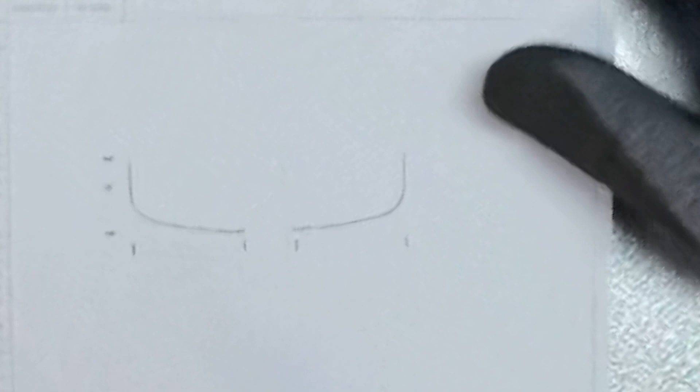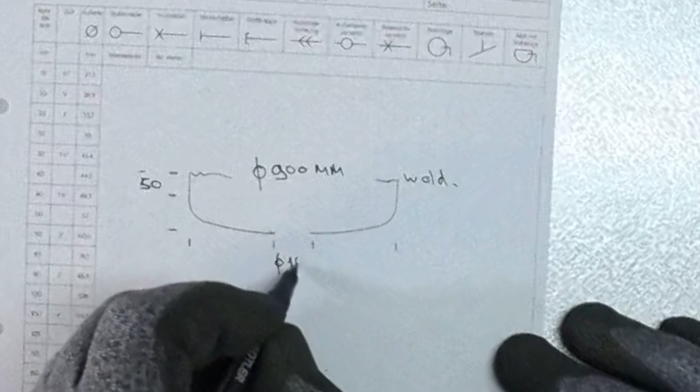Okay, so that's my dome end, and I know the diameter is 900 millimeter, and I know this distance is 50. And here is where the weld seam is, and I know here we have a diameter of 100 millimeter. So that's all the information I have.

So I went to the site and took the circumference. These are naked sizes, so there's no insulation, and the insulation thickness will be 50 millimeter.

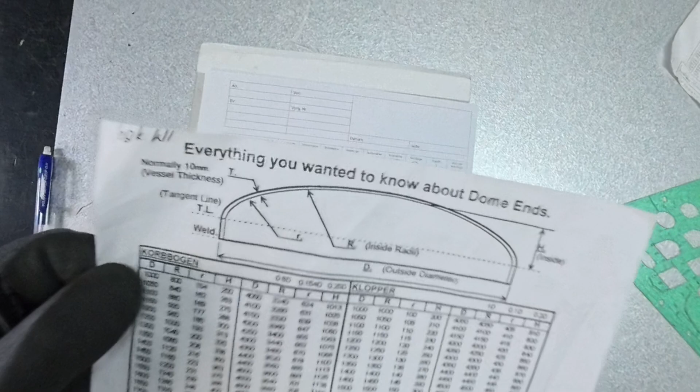And now we're going to find out what the big radius is, what the small radius is, and the height. Therefore I have a list. So I got here a list, and that's a dome end.

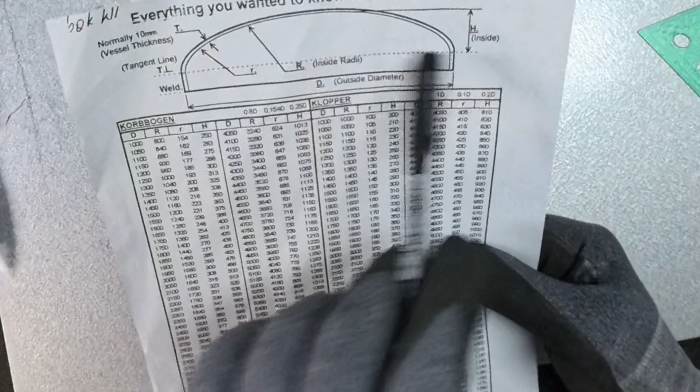I'd say the Korbbogen is most commonly made, and the Klopper, as far as I know, is mostly made out of stainless steel. For the dished one, in the insulation we then make a conical cap or something like that. But for this video we're going to concentrate on the Korbbogen.

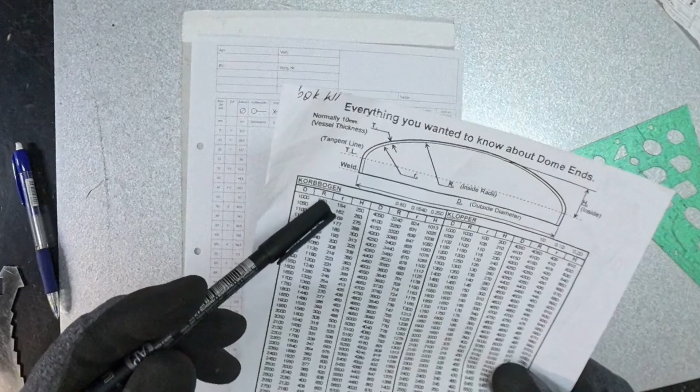As you can see here on the list: Korbbogen diameter, big radius, small radius, height. That means if I know the diameter, these three are the formulas: 0.8 multiplied by diameter is the big radius, 0.154 multiplied by diameter is the smaller radius, and 0.25 multiplied by diameter gives you the height.

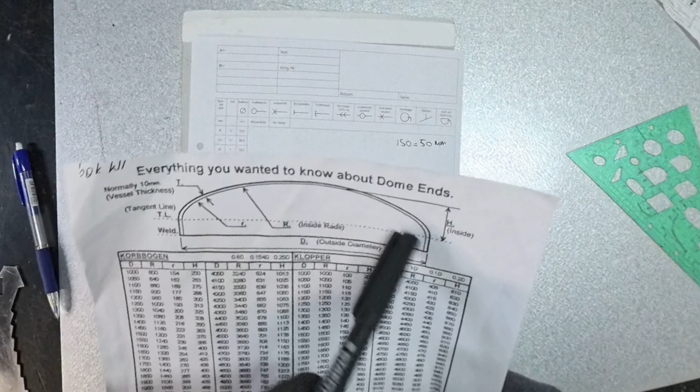But these are all inside sizes, meaning the material thickness of the vessel is normally 10 millimeter.

This list starts from diameter 1000 and goes up to 4000, but as far as I know 8000 is the biggest, and those are also real rare, so you don't see them often. What we're going to do now is calculate using those formulas, because my sizes are not on the list.

So I'm going to take my calculator, and I want to know the big radius. That means 0.8 multiplied by 900 gives us 720 millimeter for the big radius. So the big R is 720 millimeter.

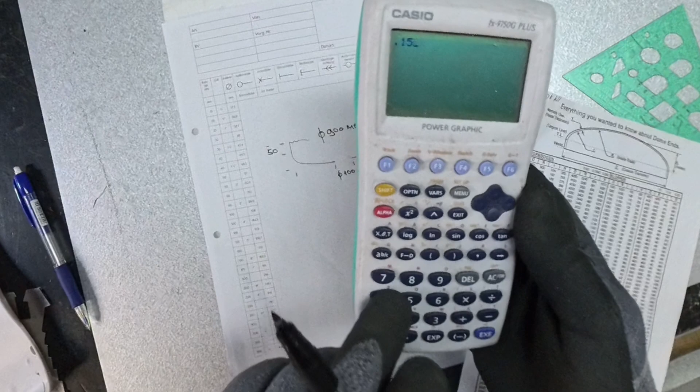Okay, now the smaller radius is 0.154 multiplied by the diameter, that means 900, gives us 139, which is the smaller radius.

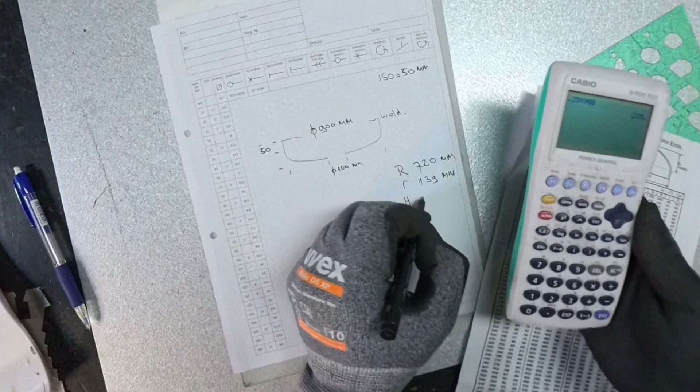And the height: 0.25 multiplied by 900 gives us a height of 225 millimeter.

So now all the information we need is there: the big radius, small radius, the height, and the insulation thickness. We have the naked diameter of 900, and we know from the weld until the end of the radius, where the radius starts, is 50 millimeter. Now we have all the sizes, so let's get started.

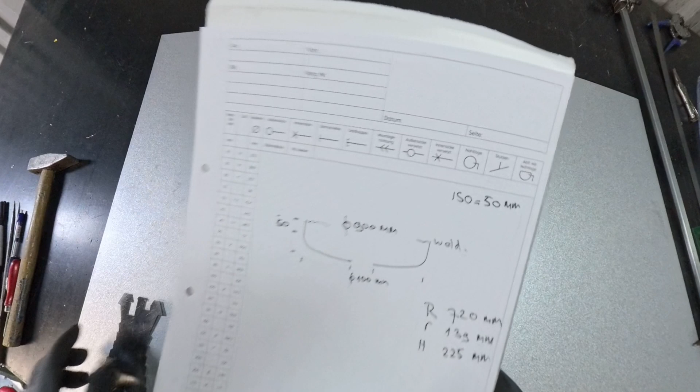First what I'm going to do is make here a working line. Okay, now we have our zero point, so I'm going to give a little punch here, so that later when I put my bow divider on, the needle won't slip. Okay, so this is the complete line.

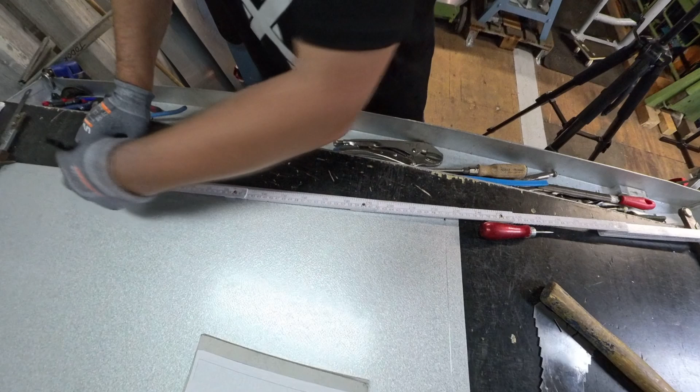And next, what we know is the big radius is 720 millimeter. So 720, we put it here on the line, and then we mark here. Put the mark, so this distance is 720 millimeter.

Okay, now what we also know is the height. The height is 225 millimeter. So that means I can already go from the 720 radius, go down 225, mark here, and I'm going to put here an angled line.

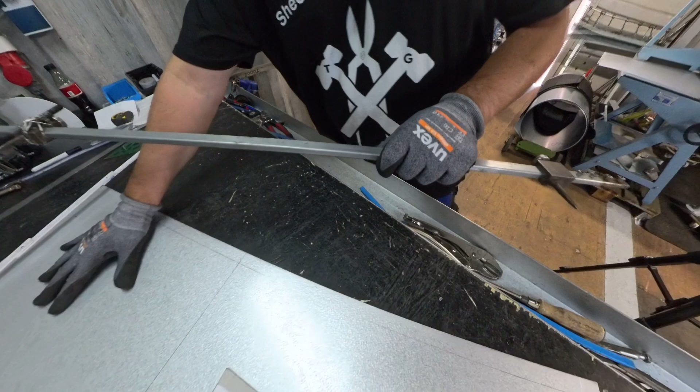And what we do next is, I have here a big circle bow divider. So what I'm going to do, I'm gonna put here this one where I marked it. Okay, wait a minute, cap off, and now I'm gonna put it here on the 720 on the big radius. Okay, got it. And now I'm gonna pull a line. So I know the small radius is coming somewhere over here, so I'm gonna make it a little bit longer. So that was the big radius.

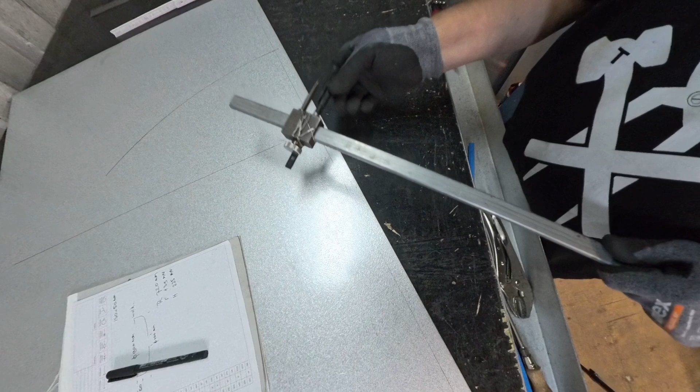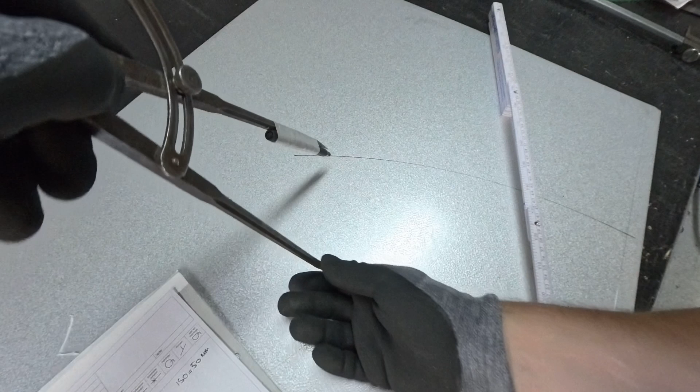Now the smaller radius says 139 millimeter. So I can do it here, take here the bow divider, 139. And now I have to find somewhere here on this line where it touches exactly, and then I make here the bow. So here could be a little tricky. Can be happen you miss it. So if you're not sure to do it and you want to do it a more precisely way, well, then it's also an easy method.

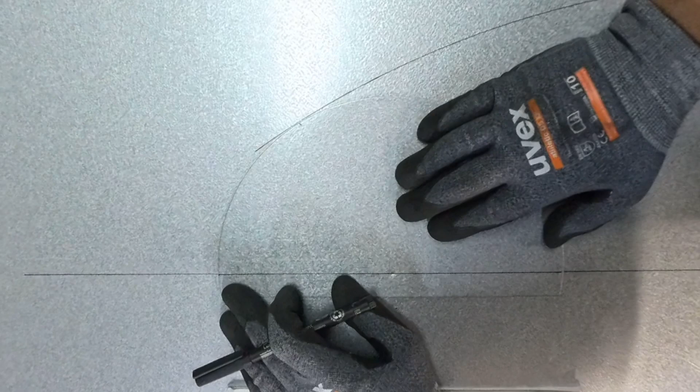You just cut a half circle where the radius is 139, and now I'm putting this here on the line and move it forwards until I see, so I'm moving it forwards. Okay, and that touches here. And then I make the line, and I'm gonna hit here another time with the hammer.

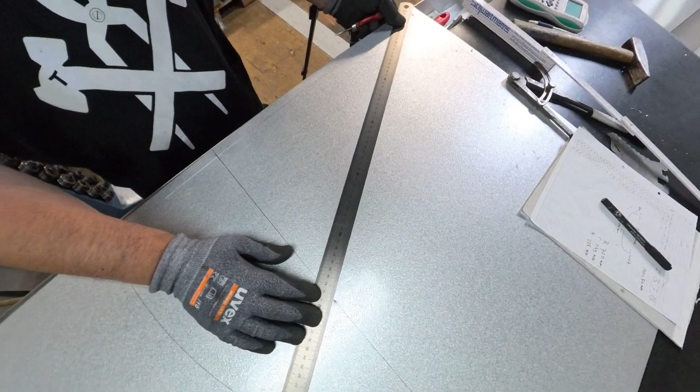So I've got a marker over there. Okay, so we check it. This should be my line. So, that's my tangent point here. Okay.

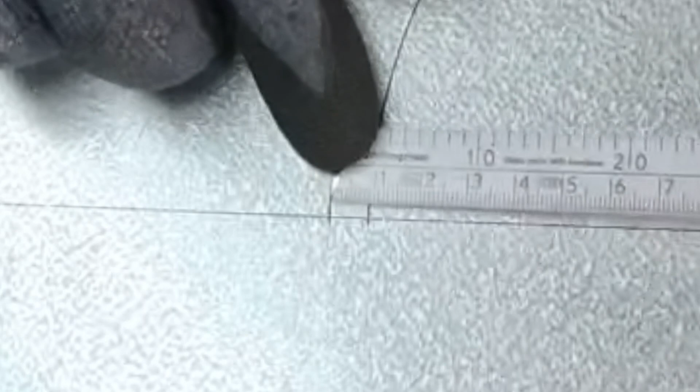Next, what we know is we have here on the paper we see diameter 900, so that means a half is 450 millimeter. So that means I go here from my starting point here, 450, and 450, and I just make here the difference. So this should be here, this distance should be then my outside with material thickness, and I have here, well, I will say 8 millimeter. So 8 millimeter I have there.

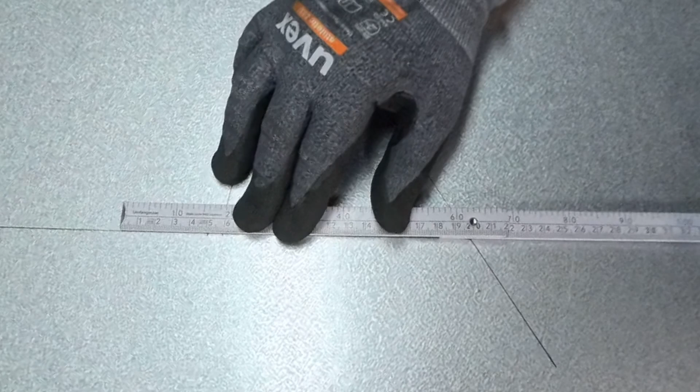So what I do next, I'm gonna take this bow divider, and because I know it's 8 millimeter, what I do first, I give 50 millimeter insulation. So, almost forgot. So that's my 50 millimeter insulation. And now, taking it from this point in the bow divider on this here, and move it until the line. See?

And the same thing I repeat with a bigger bow divider. So put it here, just put it exactly on the line there. And there it is. So that is now my outside, or the circumference of the dome end cap. And yeah, that's where we're now going to continue to make the developing, making the pattern for the dome end.

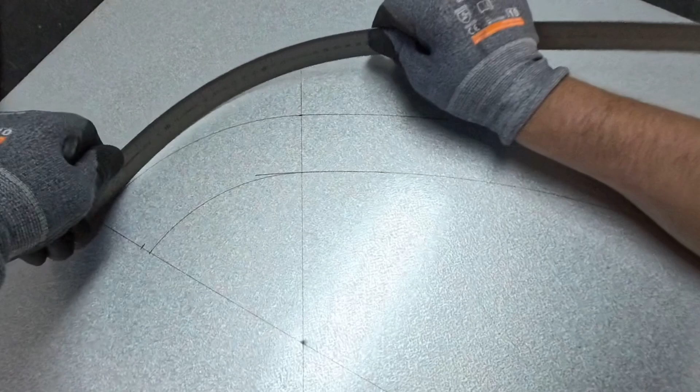Okay, so next thing, what I'm going to do is, if possible, I measure these sizes. So I have here maybe a better tool. Here, I one side with inches, other side with millimeter. It's also good. So I have here 205 millimeter. And here I have 424 millimeter.

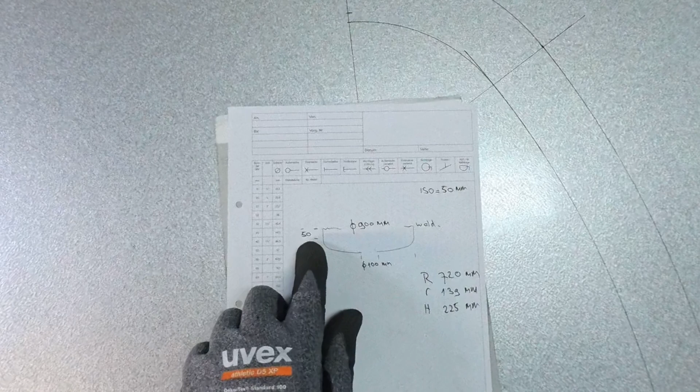Okay, so the next thing is what we're going to do to complete it. We have here this plus 50. So plus 50. I always like to check if everything is still okay, if everything is in an angle. Okay, is, so that means that's my dome end now, the side view, the complete side view from here till here.

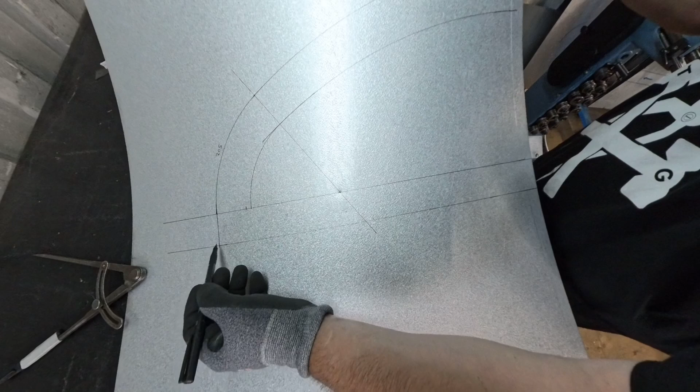Oh yeah, we had said we have a hole here, diameter of 100 millimeters, so we go 50 millimeter from here. And that's the 50, that makes double 100, so this will give here diameter of a cutout of 100 millimeter. Cutout. So here minus 50 for the template, so that we know how long we're going to cut the template.

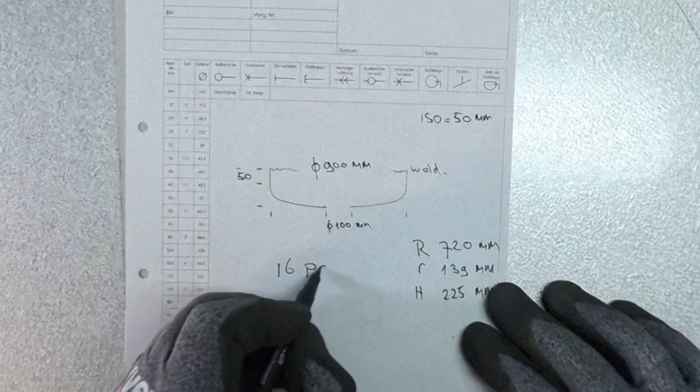But before we go there, I forgot something here to mention on this isometric. I thought it was complete, but now we are stuck to it, so I forgot it. I want to make this dome end cap out of 16 parts. So 16 parts, so you can, I always like to make dome end caps where you can divide it in 4, so 16 is easy to divide in 4. It's 90 degrees when it's 4 parts. So, and I want to make 16.

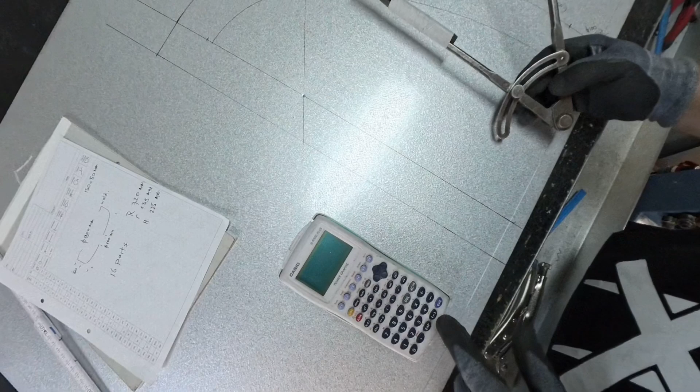That means next thing what we're going to do, you can do it on both ways, or there are 2 ways. That means if I have 90 degree and I want to divide it in 4 parts, that means 23 degree. Okay, my calculator is rounded off, but it's normally 22.5. And then you have to split it again, and then you will get 11 point 25 degree. So that's if you want to do it with an angle ruler, for example, huh?

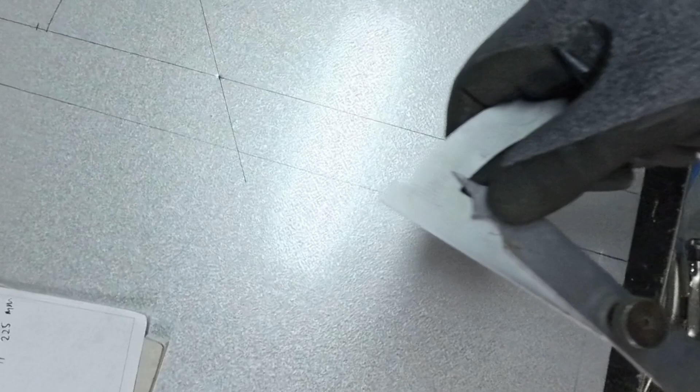So normally 11, 10, 11, and here a little bit would be 25. That means on the other side angle, other side, okay. Here 11. Yeah, so this would be my angle. But we're going to do the classic way.

Just gonna make a circle. And if I divide that circle in 2, and make here just to mark it, that will be here. So now I have 2 halves of 45, but I need 4 parts, so no problem, we're gonna divide it again. That will be the next one.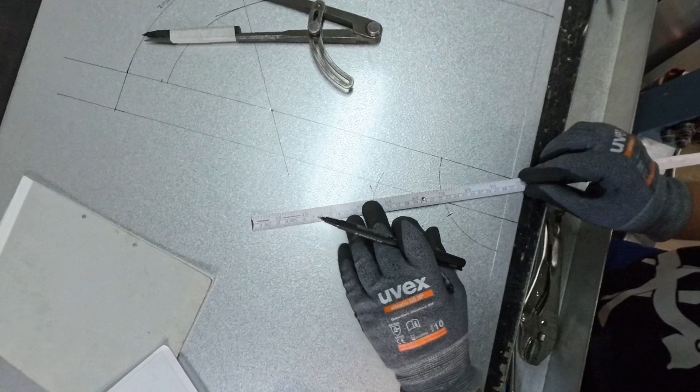Okay, so now I have 1, 2, and then here imagine 3, 4 parts. But for my template, because I'm going to go left and right with my sizes, I need it divided again. So again, 1 time here. Okay.

There it is. A longer one, so that means I go from this point here to the center of this one. That should be it. Okay, let's check it. Well, that's pretty good. So, yeah. See, so.

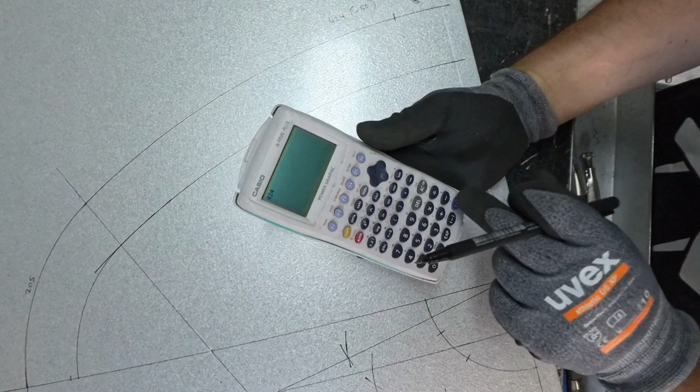Okay, now, what we do next is we're gonna divide this part first, and so it's 424 length minus the 50 gives us a length of 374 millimeter, and I want to divide it every 60 millimeter. That means six times.

So what I'm going to do, I take here 60 millimeter in the bow divider, 60, and then I'm gonna go from here, from this tangent point, 60.

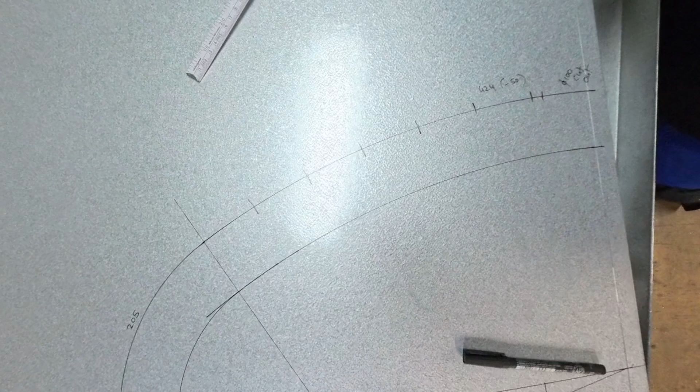Okay, so these are now divided, and now I want to divide these 205, but it's enough when I have here a screw, here one in the middle, and here, so it's easy. What we're going to do next is we're just gonna divide this in 2 halves, also with the bow divider.

Okay, so that means I'm gonna make here a hole, here, here, and maybe somewhere here. So next thing what we're going to do is we're gonna pull up those lines straight up. Therefore I'm gonna turn my metal around. And take here this one.

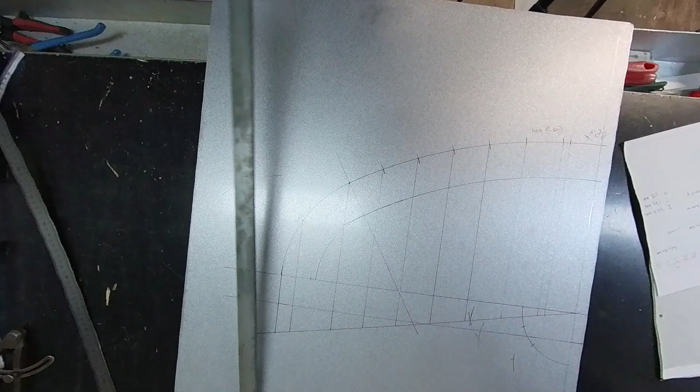And we're gonna pull those lines until here where the angled line is. Okay, so now the lines are drawn, and what we do next, because I want to give also swage allowance, and I'm going to give 6 millimeter swage allowance. So 6 millimeter comes here a line.

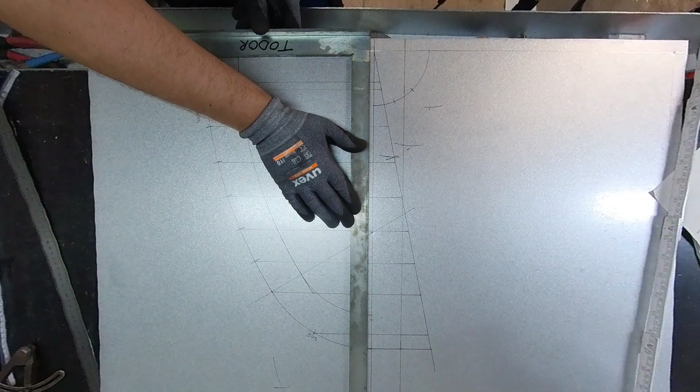That means now these are now my points. Okay. That's it. These are now my points. So what I do next is

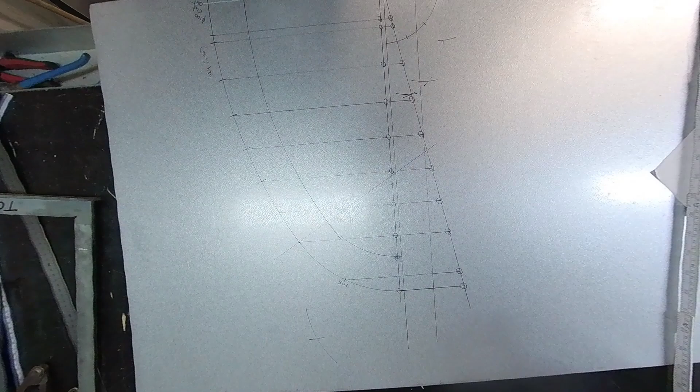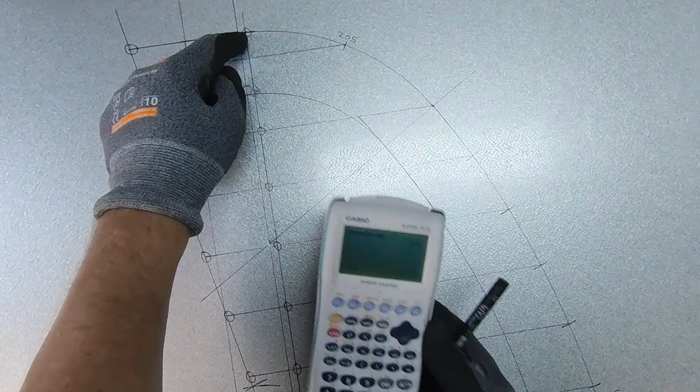I'm gonna take my calculator again. So 205 plus 424 minus 50 gives us 579. See the complete circumference until the cutout. But we have plus 50. So plus 50, 629 millimeter is my outside circumference of my template.

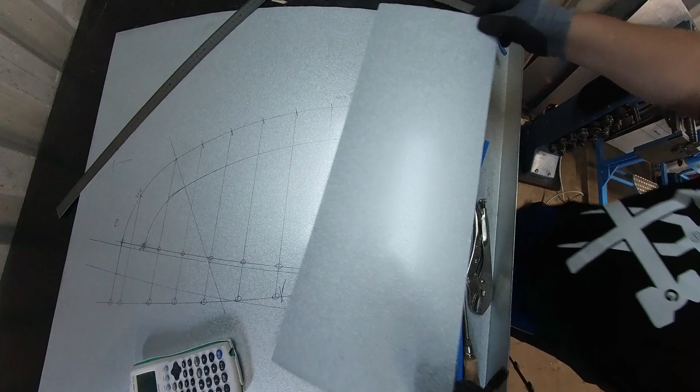Okay, now, I've got the metal. Let's have another check. So see, here you can see it's 629. So what we already know is we have here this 50, so that means I can already scratch here my 50 millimeter from the side.

And what I also need is a center line, so I have here 230, so 115 is half. Okay, so that means here that means that bow outside size is 205, so 205 is here, and the middle of it and a half is somewhere here, 102 and a half, so here.

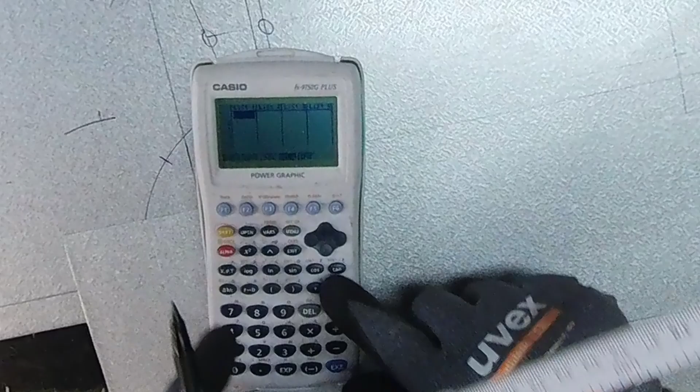And this size should be then 424 minus 50 gives us 374. So let's have a check. Yeah, 374, here you have it.

Okay, so now we go every 60 millimeter. Okay, well, that's it. See, that's that part. Okay, we're good.

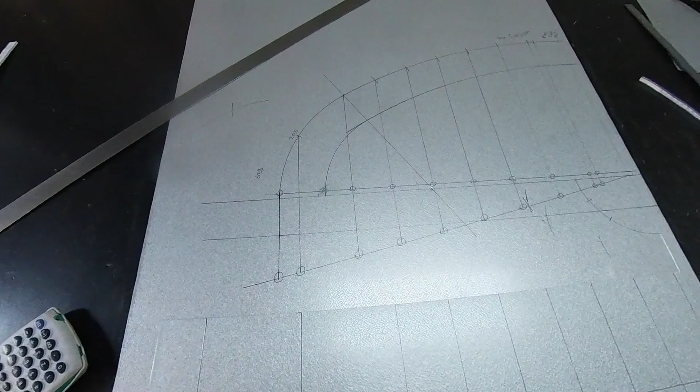So what's left is we're gonna drag those points over by, well, you can number it if you want. So I'm gonna turn this around. Okay, so if you want to number it, number 1, 2, 3, 4. So number 3 is the tangent line. 5, 6, 7, 8, 9, and 10. Okay.

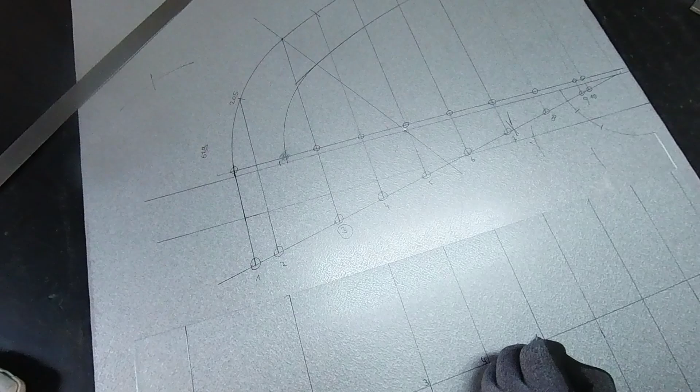That means dragging over the points. So this is here number 1, 2, 3, 4, 5, 6, 7, 8, 9, and this is actually 10. Okay. Yeah, so this is the 0, this is the straight part. And that's the same size as here comes. Okay. So dragging over now.

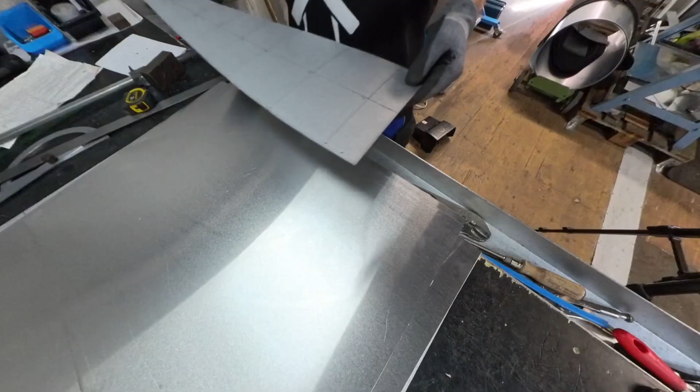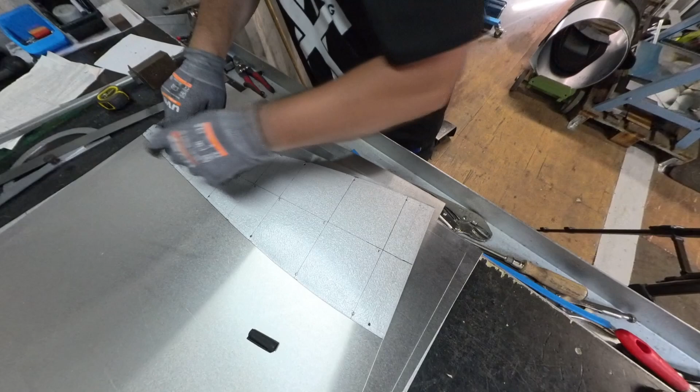Only done 2, so 14 to go, so I'm gonna skip that part. I'm going to finish this in between, and when I've done, we are going to continue.

Okay, so now I'm done. This is one metal, so 1, 2, 3, 4, 5 pieces on one. And I have here another 5, and that makes 10. I've got 5 more, that's 15. And I have 2, 16 and 17, but I just leave one just in case. I don't think I'll need it. So the next thing, let's have a cut.

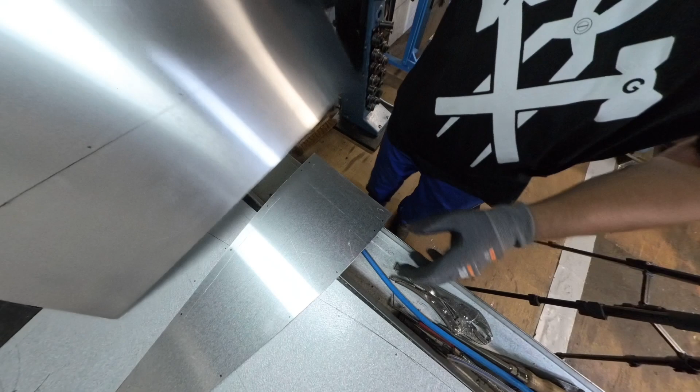Okay, one left on the metal. And now I have here 16 pieces all cut out. So what we do next, the next step is punching those holes.

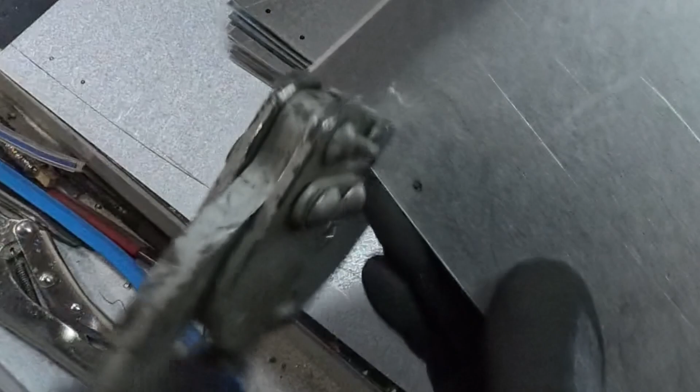Now there are different ways to do those holes, and one of them is by punching it. Okay, so I've done now, so it's very time consuming when you do this, but I just want to do it by hand because it's better. So there's also another way, but first I'm gonna punch out a bunch of them, and the last four I'm gonna show a different method with.

So 1, 2, 3, 4, and these ones I'm gonna punch out now by hand. So I'm gonna also skip this part in the video. Okay, that's it, that was the last one.

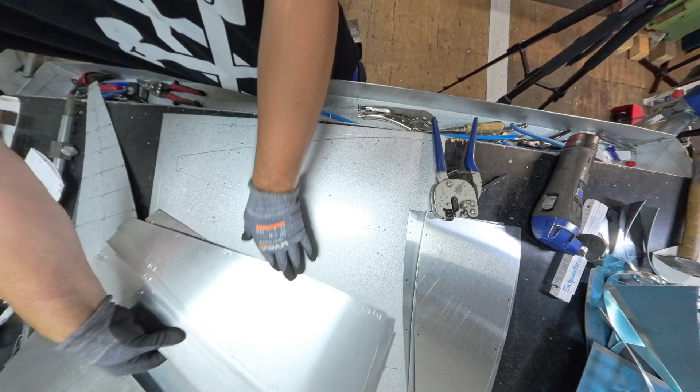So I have here 12 pieces already with holes and done. And then I have here also 4 pieces left, I didn't punch out the holes. So what I'm going to do, for example, here...

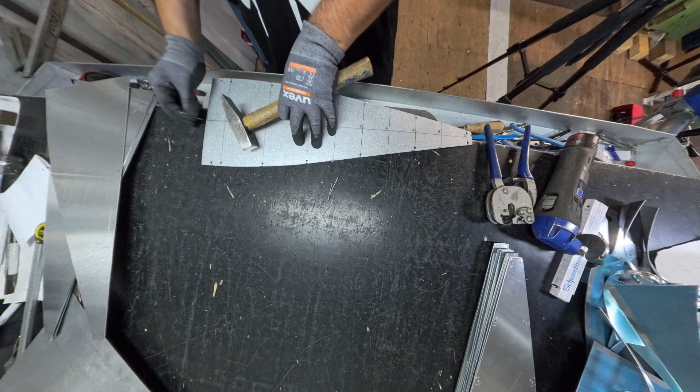So now it's always in the right position. So what I'm doing now, putting here one on this one, second one... so I have now here 4 pieces.

Now, of course, you can make more if you want. So I'm not going to use the template, because if you use the template, it can damage the holes. So therefore, I'm gonna take another segment I already done, and I put it straight on it. So now as everything is fixed, see. So next thing is I'm gonna put here the vice grip.

So the next step is, when you drill it, it's very important you keep your drill straight. That is also an alternative to drill the holes, but you have to cut all your segments very exactly. Okay, so it's done.

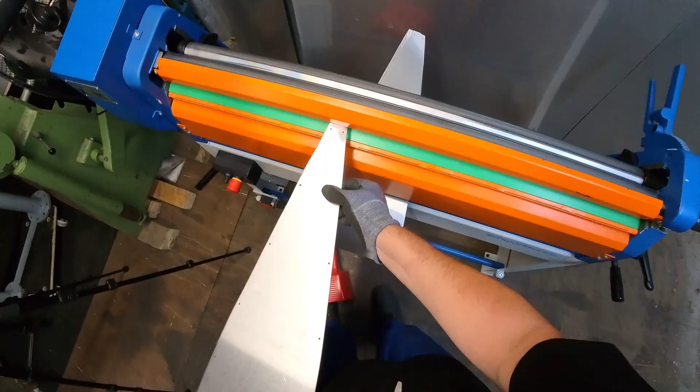Okay, I'm now at the rounding machine, so just gonna round it here a little bit. Here's where the tangent point is between the 2 radius, so I'm gonna pull it here more up. Then just leave it, and well, this is the form. Let's have a look. So that means if I round it here, so this is where it is. See, so it must need a little bit more. Okay, no problem, a little bit more.

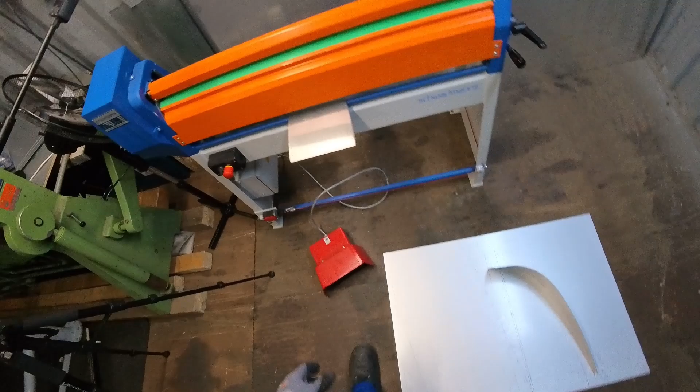Okay, that should be. That's the form, I think it's gonna be good. So what I'm going to do next is continue rounding all those parts into form.

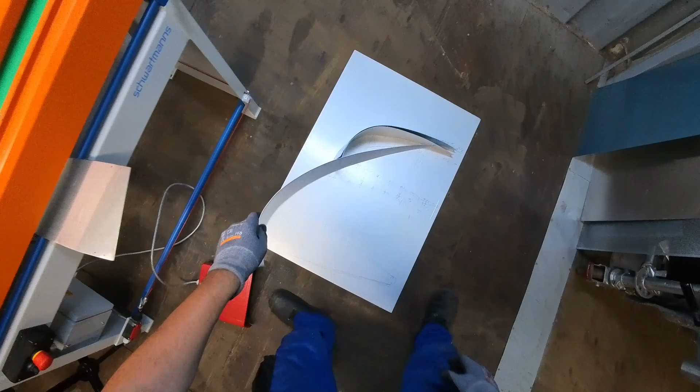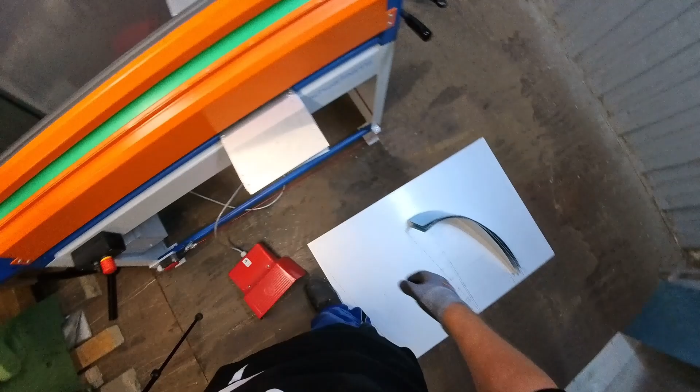And also the other ones, also I'm going to round. I'm gonna skip this part also, so I'll round it. Oh, something gets stuck here, see. Okay, well, that's the last one.

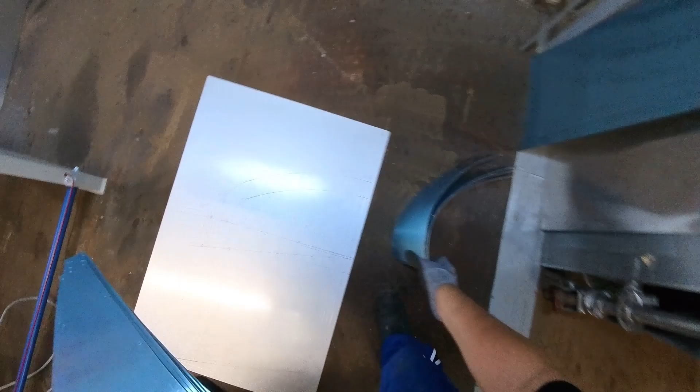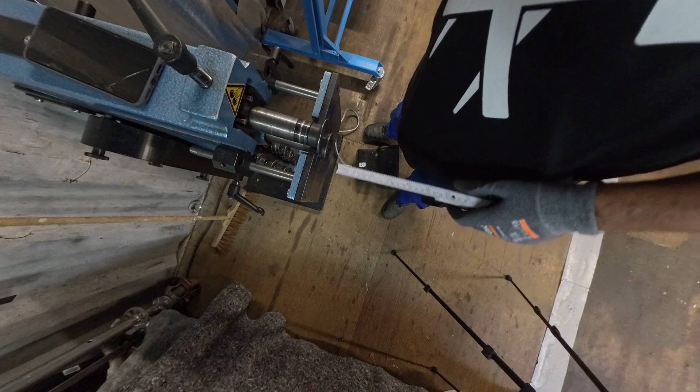Everything is rounded, and the next thing we're going to do is swage it and try to put it together. These are the 4 that I've drilled. I've set up here with the swage wheels number 0, and I have from the plate until the center of the upper wheel 6 millimeters. Okay, well, let's have a start, let's see how it goes.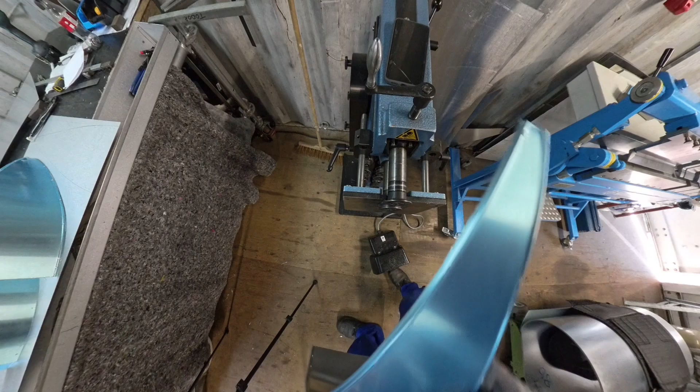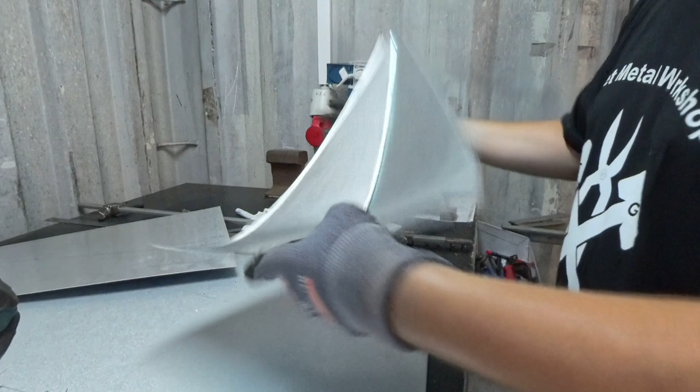Okay, that's one, so let's have another one. Here always a little bit, you pull it a little bit up. Okay, now let's have a first look. So we can see here if it is in form.

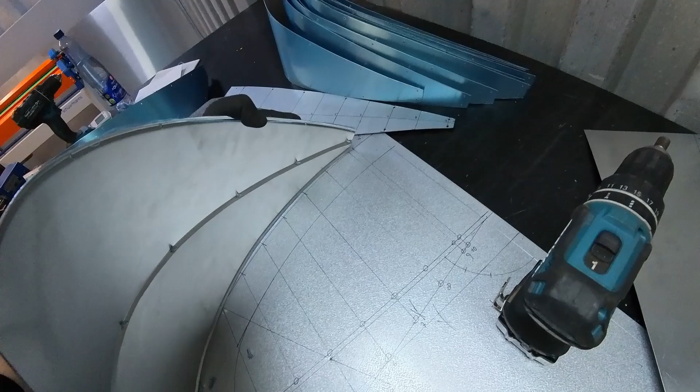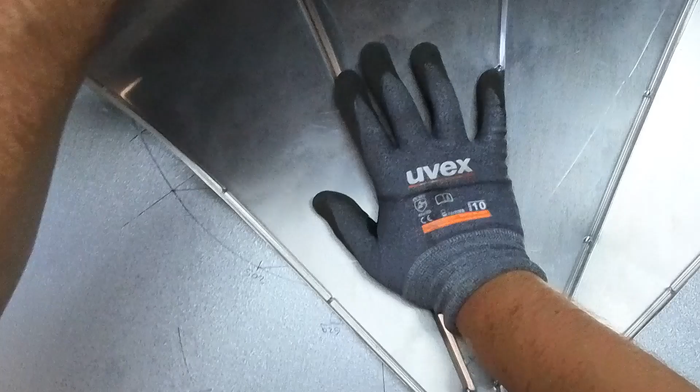This is how it should go. That's the one, I'm gonna finish this one up and put 1/4 together. Okay, 1/4 I have put together, so I'm gonna bring it a little bit in form.

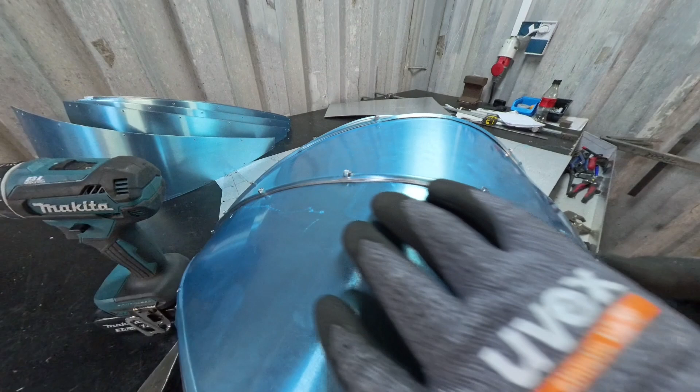So this is here the part, that's in form. Okay, well, that is the part where I put in with the drills. This is the part I did the hole with the drill. And now I'm gonna take 4 other pieces and swage it.

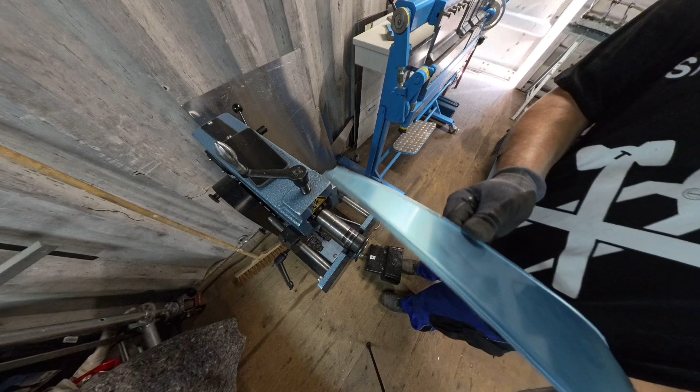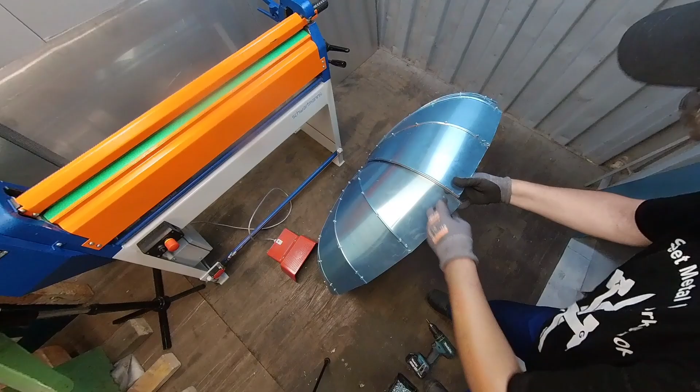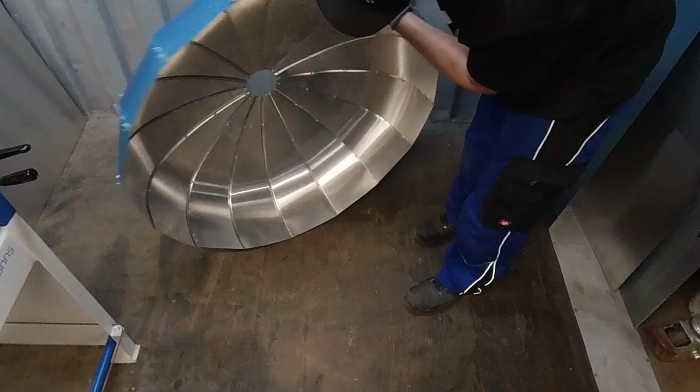Okay, well, that's the dome end. From the inside, from the outside, wait a minute. So that's it. So we have here the hole, see.

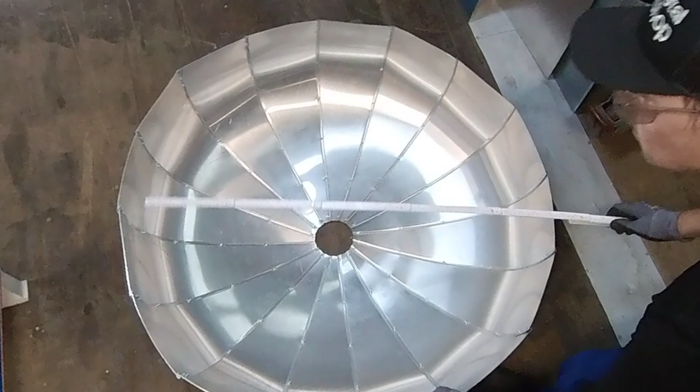100 millimeter, and this diameter should be 900. So just gonna check it. 1 meter, I'm sorry, 900 plus insulation 50 is 1000. So here's 1000, and if I put it like this, okay, that will do. 1 meter.

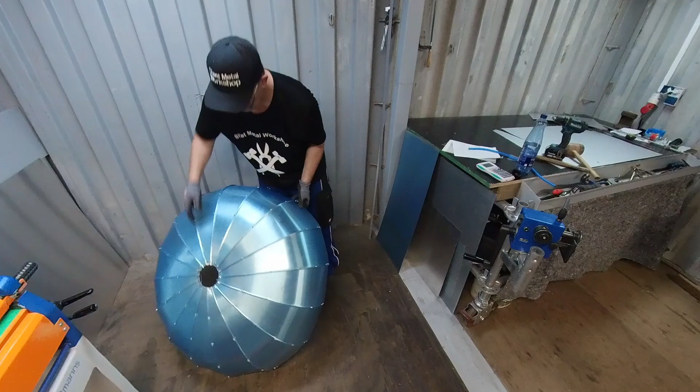Okay, I hope you liked the video. I mean, it's a lot of work cutting it by hand and doing it. So that's it. Made a dome end layout complete by hand, and I hope you enjoyed the video.